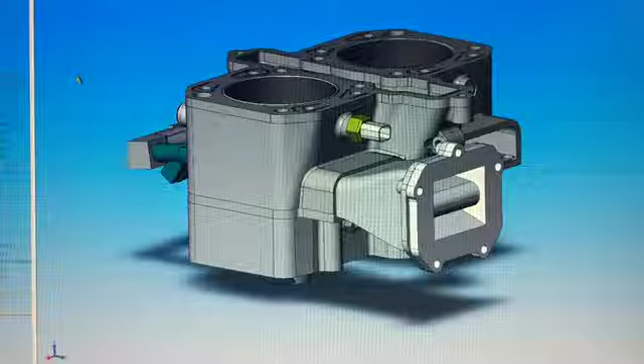So this is my mushroom piston engine design. I thought I'd show a video of a SolidWorks assembly. You can get a better idea of how it works or what it is. So this is a two-cylinder design for the Kawasaki EX500, which was a four-stroke originally, of course, and it uses the Kawasaki head as a four-valve exhaust-only head.

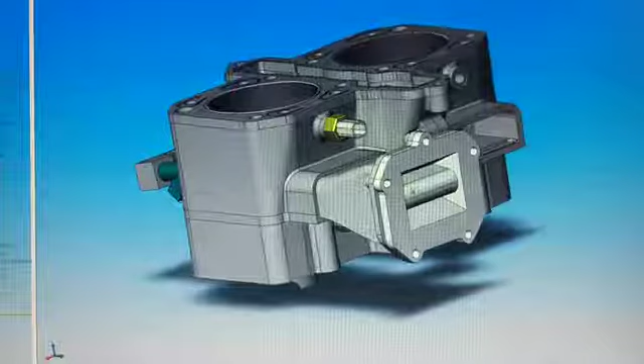So here's the reed intakes. Reed off a KTM 300. It uses low pressure direct injection, so here's the EV1 injector, the fuel rail here. I'm just showing one injector. And the assembly's complete on the left cylinder.

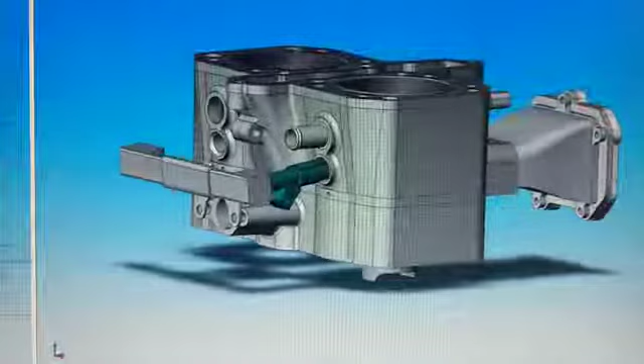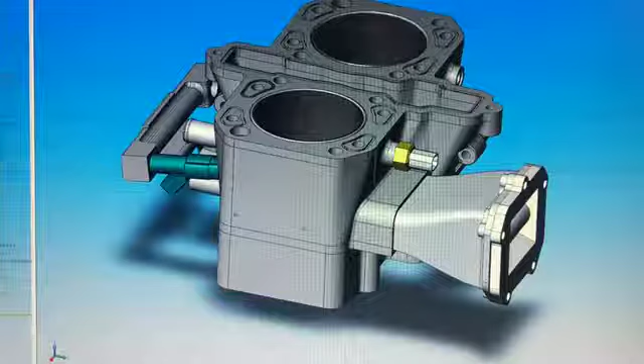Here it is. This is the water inlet. There's the temp sensor, cylinder temperature sensor, coolant temp. There's that. So I'll show a section view of it. Go to plane, display. Okay, here's a section view.

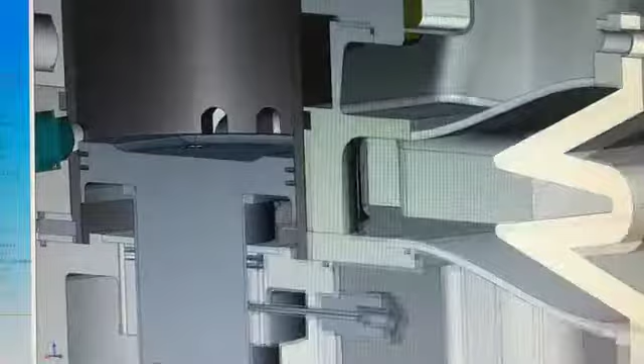So you get to see the reed inlet. This is the inlet chamber here, and then the transfer ports in the cylinder liner. So as the piston moves down, it compresses the volume below the piston in this area here, and then the transfers open, and the

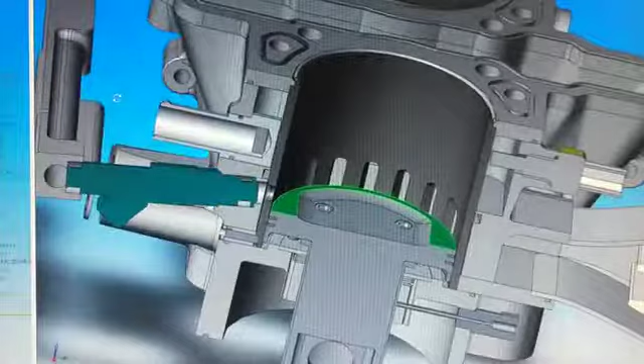pressurized air-only mixture transfers through into the area above the piston. And at the same time I time the injector to fire, so the injector fires across the air charge that's going through these ports, the transfer ports.

Oops. This thing doesn't want to cooperate with me again.

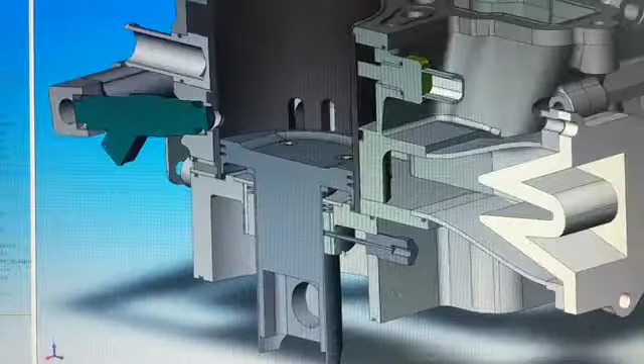Anyway, so it uses the oil rings. The oil rings are an external ring down here. And this is the piston liner, so this is steel. This design uses a narrow wrist pin. I'm working on another design to reduce this diameter here, because this increases efficiency when you reduce this area here. You increase this area here and reduce this diameter here, so I'm changing the connecting rod.

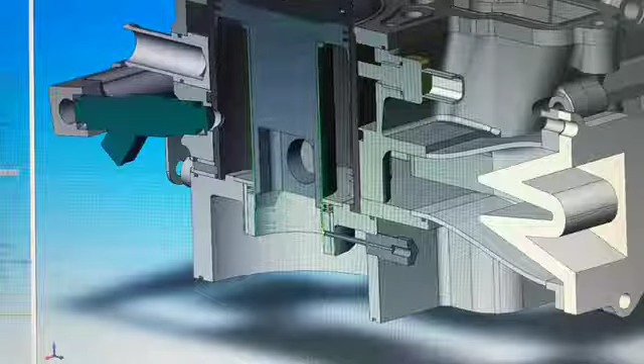This is an external oiler, just to add some oil to this bore here, plus this point goes past in the maximum stroke. This goes past here, and this little oil injector adds some oil to the wrist pin area. I found the wrist pin needed a little more oiling. So here we go.

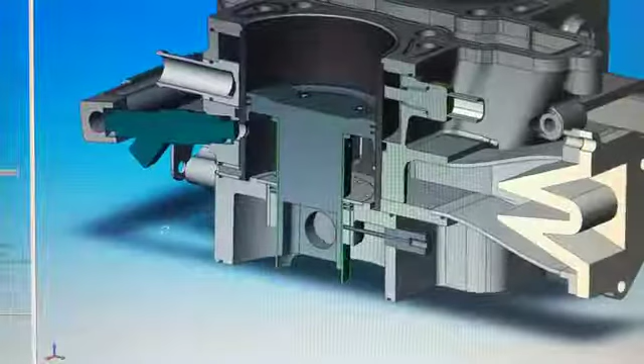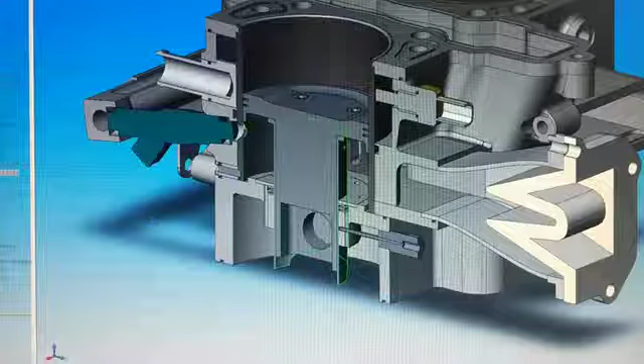I've got about 3 hours of time on it right now, and about another hour of time with the turbocharger. I decided to add a turbocharger to it to see how that was, but basically two-strokes never work with a turbocharger. This one can, because it doesn't have the piston face heating, etc. And plus the mixing from the exhaust to the intake is much improved over a typical port two-stroke. Anyway, there you go.